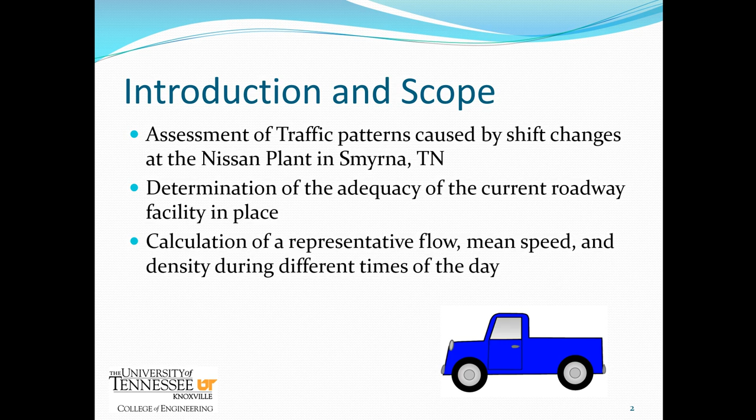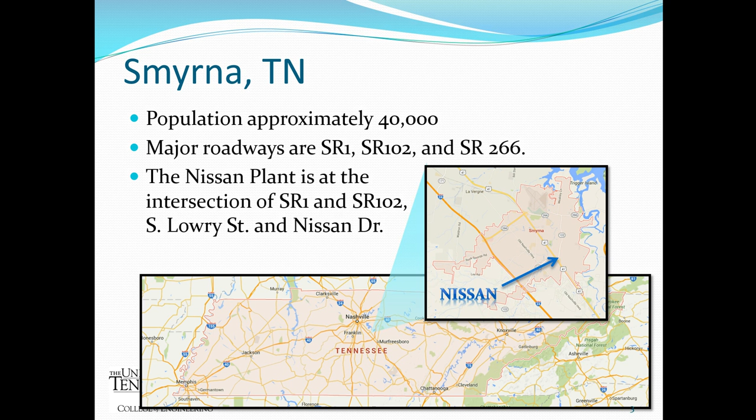Smyrna, Tennessee is located in Middle Tennessee, and the Nissan plant is in the southern central part of the city. The population is approximately 40,000 people, and there are three major roadways: State Route 1, 102, and 266. The Nissan plant is at the intersection of State Route 1 and 102, known as South Lowry Street and Nissan Drive, respectively, and this is the name we'll use for the remainder of the presentation.

The Nissan plant in Smyrna employs over 8,000 people, and most of the gates are along South Lowry Street and Nissan Drive. There are also a few gates on side streets that eventually connect into these larger roads. There are three primary shift changes: 6 a.m., 2 p.m., and 10 p.m.

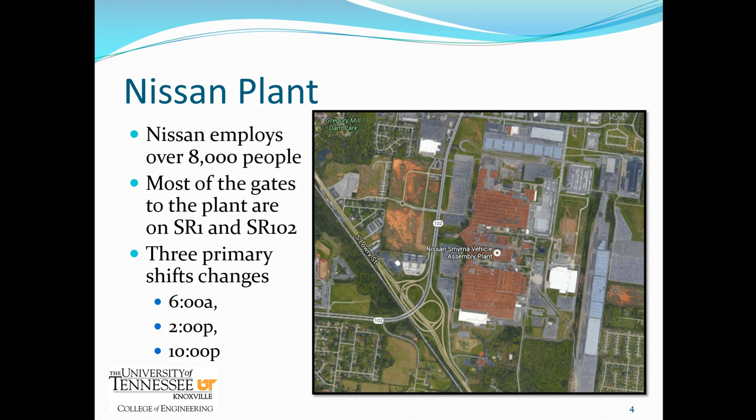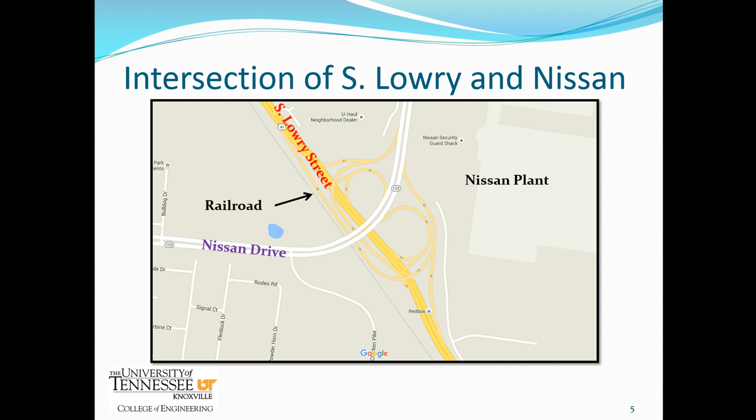The intersection of South Lowry Street and Nissan Drive looks like this. Here's Lowry Street and Nissan Drive. It's kind of an odd shaped intersection because of this railroad, which actually runs underneath the bridge where Nissan Drive crosses over Lowry Street. The Nissan plant is located over here to your right.

Here's some on-site photos. Both roads are 4-lane facilities, divided highways, and they have ingress and egress points to the plant, and most of them are signalized intersections, and they have right in and left out.

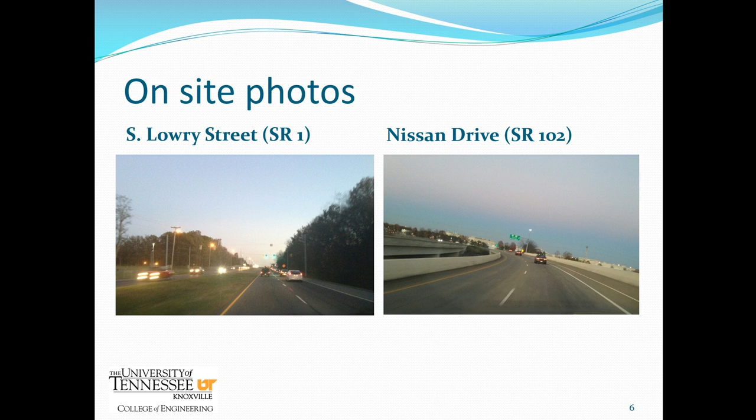For the approach, we will measure the effect of the Nissan shift changes on the traffic. We'll determine the flow and speed, calculate the density to provide a numerical representation. We'll use the moving observer calculations discussed in lecture.

We'll take measurements of the lengths, and we will count the cars that pass the driver as we observe, and those in the opposing traffic direction.

We'll collect data for two of the primary shift changes. We won't be collecting data for the 10 p.m. shift change because it will be dark and it would cause safety hazards for us, as well as not being able to see very well to make proper observations.

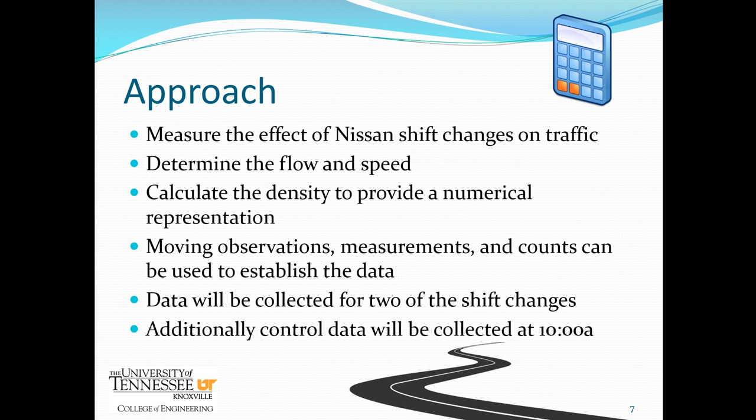But we will add a control time, and that will be 10 a.m. This is a time of day when traffic is relatively normal in Smyrna. There's nothing there that would cause a peak flow.

The first thing we did for our research activity was to set limits on the area to be included in the study. For South Lowry Street, we began at Sam Griffith Road, which actually itself has an ingress into the plant, and we continued up north to the southbound exit ramp. The beginning of that totally encompassed the intersection.

Across from the southbound exit ramp, there's a guide sign there, so this just seemed like a good place to include from start to finish and have everything inside of the stretch of road that would be affecting the Nissan plant. The stretch on Nissan Drive begins at Chicken Pike, which is on the left side of your screen, and then it extends up to Enon Springs Road.

Chicken Pike is the first road on the opposite side of the intersection, so it's a good indicator for where the traffic related to this intersection and the plant ends.

Enon Springs is a fairly large local road, and it has ingress and egress into the plant as well. The road lengths in both cases were determined by DMI. On South Lowry Street, we measured 6,756 feet, and on Nissan Drive, 6,658 feet. So they're very close in length.

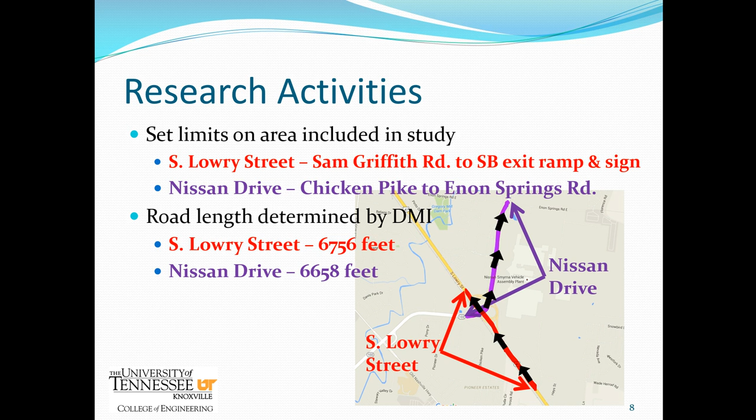As I mentioned previously, we used a moving observer equation. We calculated the flow by counting the number of cars moving against the traffic, which is X, and then the net number of vehicles who pass the observer, which is Y. TA is the time moving against, TW is time moving with the traffic.

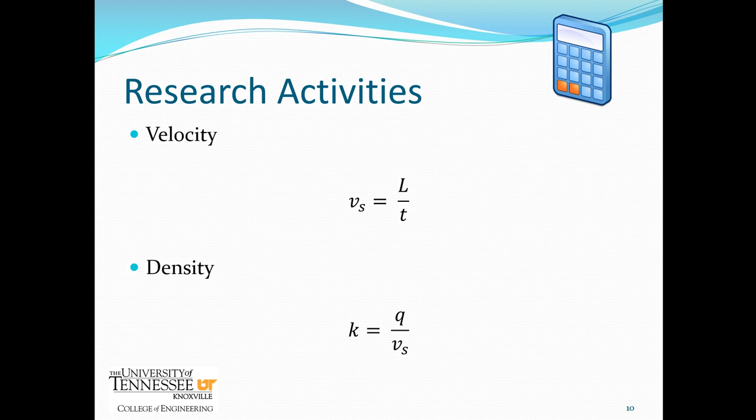Mean travel time can be calculated using that time moving with the traffic, the number of cars who pass the observer, and the flow just calculated previously. Velocity is calculated with the length and the mean travel time, and density is calculated by the flow and the velocity.

Data will be collected by physically driving the road segments, at the times of 6 a.m., 10 a.m., and 2 p.m. We will drive in each direction and measure time, distance, and the net amount of same direction vehicles passing the driver and the number of vehicles in the opposing direction.

This is our control data, basic raw data that we saw. As you can see, we generally never passed or were passed by more than one vehicle during our control time.

So we used the X, Y, TA, and TC calculations to get our Q vehicles per hour. It ranged from 550 to 650, depending on what street and what direction you were going. V sub S, our calculated speed, was anywhere from 38 to 45 miles an hour. The posted speed limit on this road is 45, so we were never over it, and we were generally going with the flow of traffic. Our density for our control time ranged from 12 to 17 vehicles per mile.

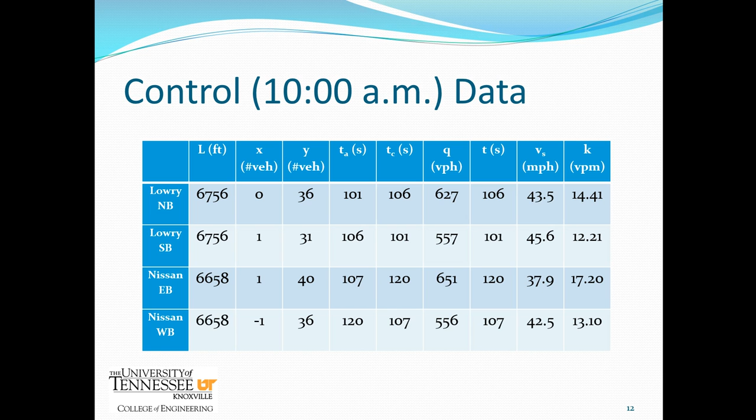This is our 2 p.m. data. As you can see, flow and density both increase, and speed decreased here too.

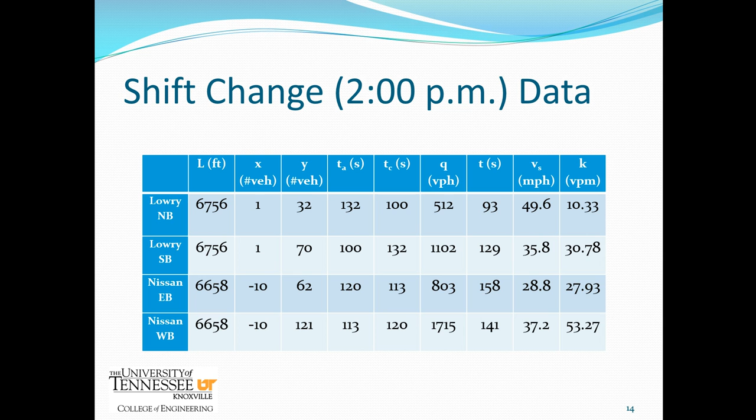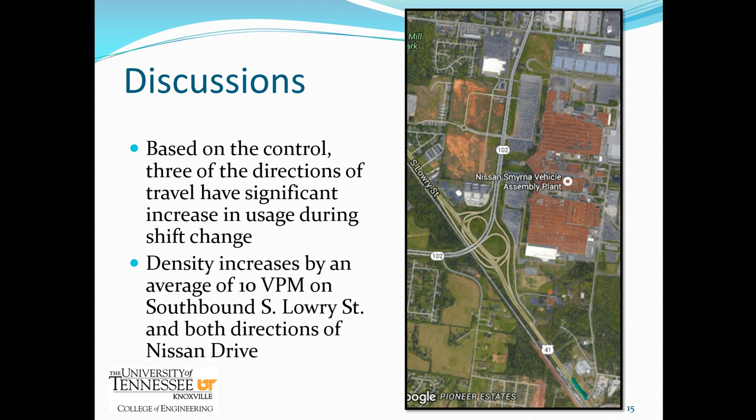Here's our discussion. Based on our control times, we have 3 directions which show a significant increase in usage during shift change. We have 3 entrances from the plant on Nissan Drive and 2 entrances on Lowry Street. Our density increases by 10 vehicles per mile on southbound Lowry Street and in both directions of Nissan Drive. On southbound Lowry Street and westbound Nissan Drive, we see an increase of roughly 500 vehicles per hour. Eastbound Nissan Drive sees an increase of about 200 vehicles.

Speed decreased 5 to 10 miles an hour on both roads, and we wanted to put a caveat here that our measurements can be affected by the presence of the signals leading into the plant. They can slow our time down or increase our time, so there's a little ambiguity in what our calculations actually were.

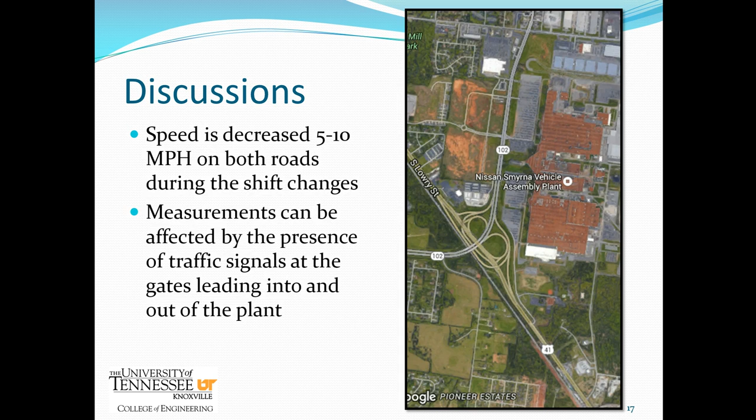Our conclusions are that westbound Nissan Drive and southbound Lowry Street are the primary usage roads during shift change. This makes sense for two reasons. First, westbound Nissan Drive has direct access to I-24, which is easy travel time to Nashville and into the Smyrna area. You can go out there and avoid a bunch of traffic in downtown Smyrna and get home easy. Southbound Lowry Street is the primary route to Murfreesboro, the easiest, quickest way to get back. So all 3 of these places have people that work at the plant.

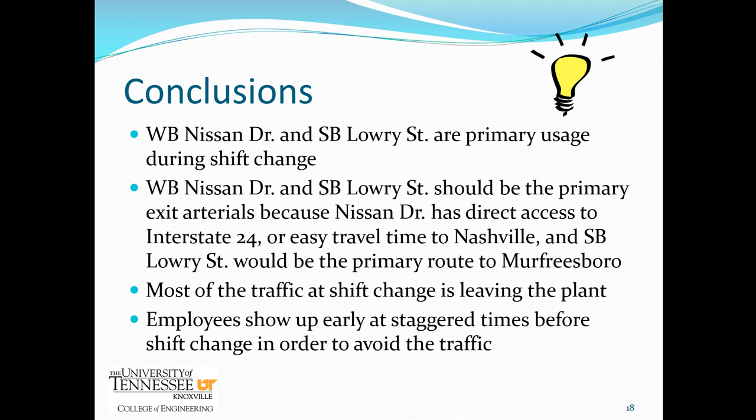The second reason is that most of the traffic at shift change is leaving the plant. We talked to several employees, and they said there's no set time to show up for shift, except you have to be there before shift change occurs. So they generally arrive at staggered times to begin with, meaning we don't capture all the inflow, just all the outflow from what we studied.

We did have one unexpected outcome on northbound Lowry Street. It actually sees a drop in usage during the 2 times we studied shift change, compared to our control. We inferred that local traffic knows to avoid this area during shift change, so we wouldn't see our control traffic level—instead we'd see it decrease through here.

Additionally, this is also due to the irregular arrival times of the shift workers. It can also be that a lot of the traffic from northbound Lowry Street hits eastbound Nissan Drive to get into the plant, so we would lose some traffic from Lowry Street getting on Nissan Drive that we'd instead see in the Nissan Drive calculations.

In summary, this facility is currently adequate to keep traffic flowing during peak usage, which we assumed was during the Nissan plant shift change. There's also another time of high usage in the mornings when there's a lot of traffic going to Nashville from Murfreesboro and Smyrna to work, but that was not what we were studying—it's not really what we were interested in. We just assumed that peak usage was during shift change at the plant.

Northbound Lowry Street and eastbound Nissan Drive do not approach jam, nor do they have any shock waves created in their flow during shift change. There's no backup because traffic is just heavy. Southbound Lowry Street and westbound Nissan Drive approach it but never reach jam density.

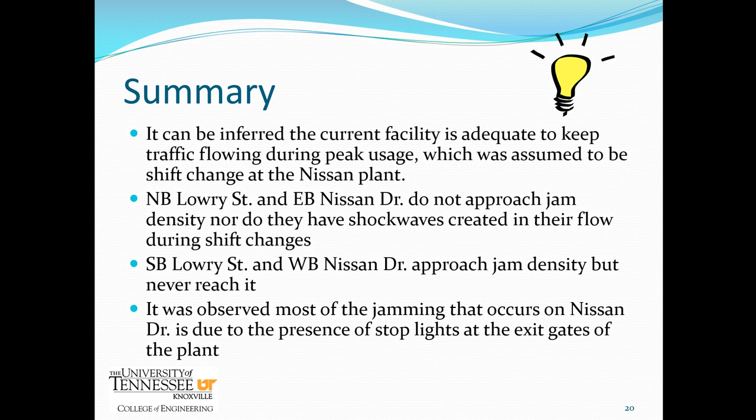It was observed on our end that most of the jamming occurs at the gates because of the signals. People would stop, traffic would back up. This has created traffic jams in the past. We were there to look at something else at one time, and there was a lot of traffic in the area, but it was not because of the amount of traffic—it was because of the signals.